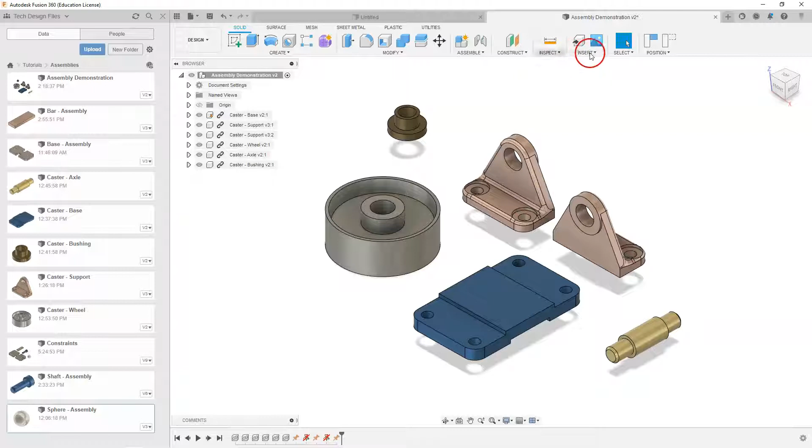So with this in place right now, I am going to select assemble and joint, or J for short.

What I want to do is select this hole with this hole here. I have to select the object that I'm moving first, and select the center of that hole.

And place that on the center of this hole. It will move into place, and I do not need to make any other adjustments.

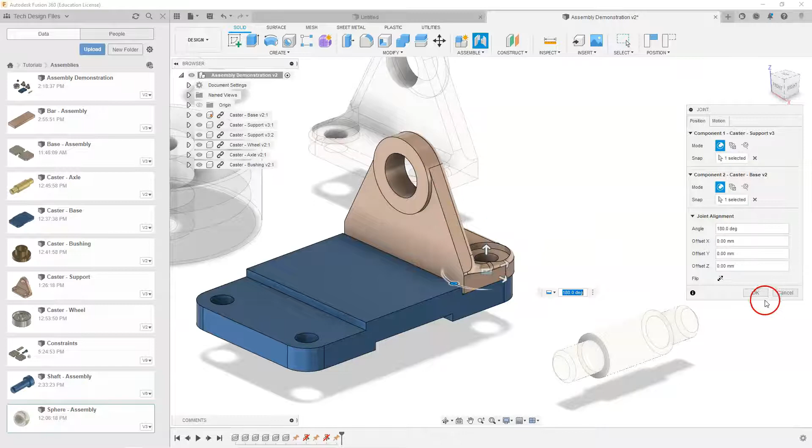If I look at the right hand side view of this, maybe I'll look at the left hand side view instead, might be easier to see. Moving this out of the way, there is a gap in there.

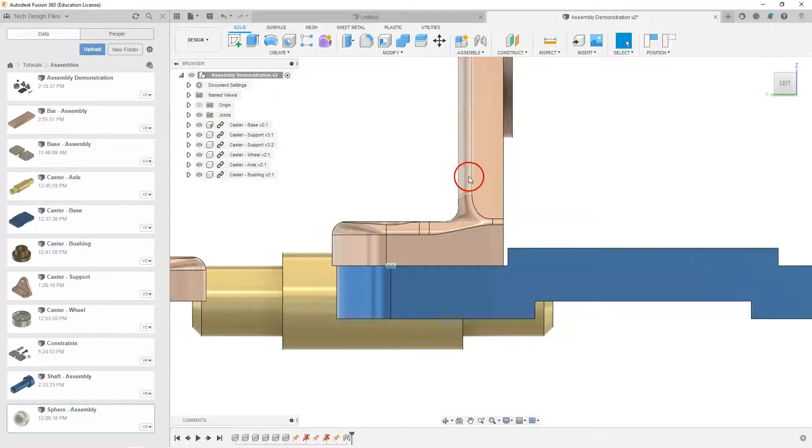So back to our design intent. The design intent is that these holes need to line up. So don't just assume that because this edge is flat, or this surface is flat in here, that those are what we want to align.

We want our holes lined up, looking at the top view, so our holes are lined up the way we want them to be.

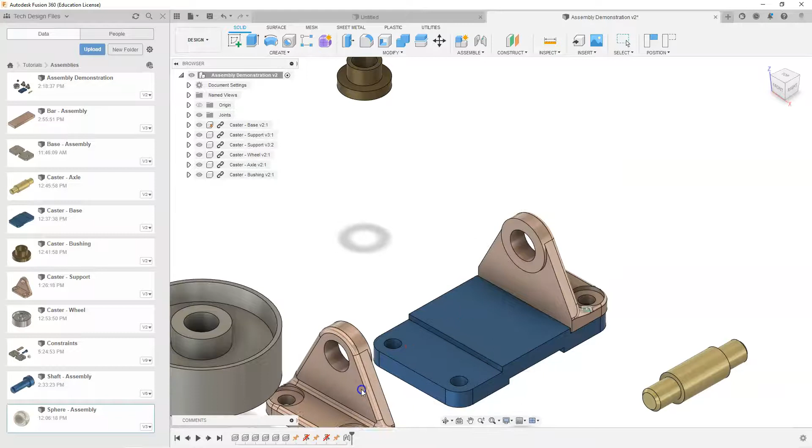So we're going to go in and add our second support, and using the same constraints, I can just move it over here for convenience, and I'll select J for joint.

And I'm going to select once again the center of that hole with the center of the hole in my plate, and that will move into place.

I don't need to make any other adjustments, and my motion is fixed. So if I select animate, you will see it shakes.

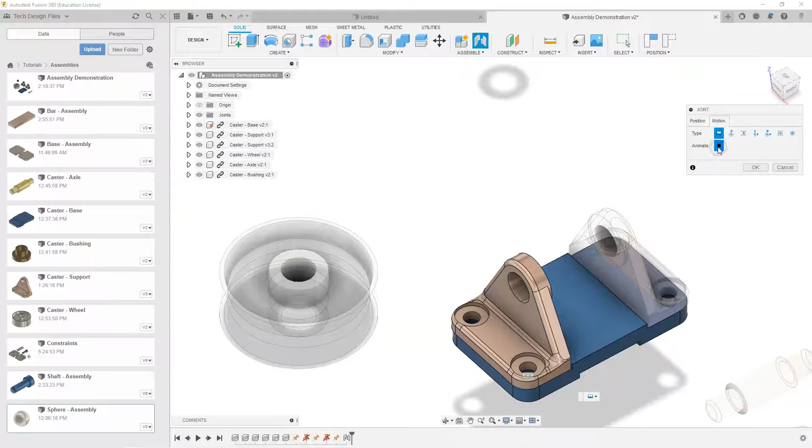That means there is no movement. So I will select OK, and we are done adding our caster supports. Both of those are in there, and I'm just going to go ahead and save my file.

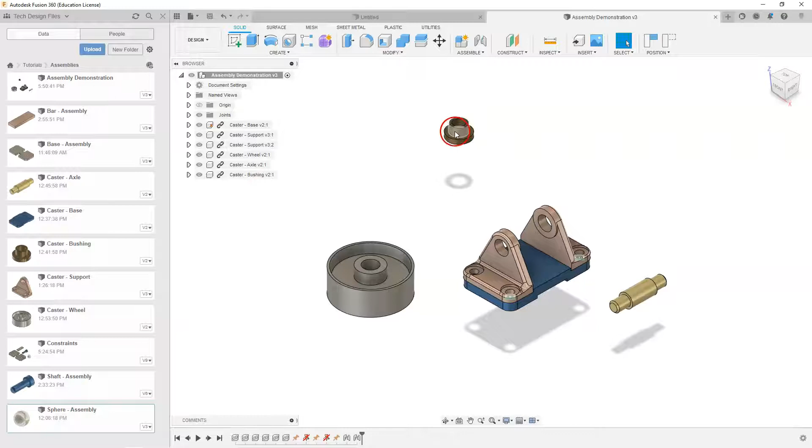The next component we want to assemble is our bushing. We're going to put this bushing on the inside of the surface here. So J for joint, and we want this surface here.

I'm going to select that surface and that center, and join it with this surface and this center. Select my second object, and there we go. That should move it into place.

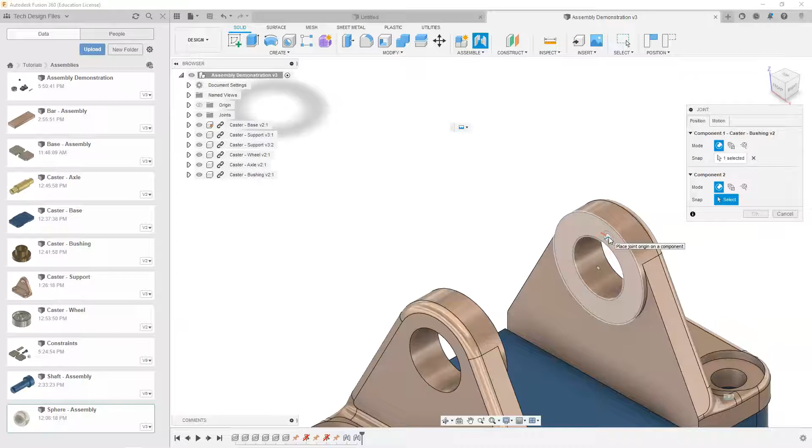And this is going to be fixed as well. So checking our motion, that is fixed. We do not want that to rotate. Select OK, and we need to put another bushing in.

We don't have one, so we can use the move copy command, or we can drag one from our data panel over there, and then move that into place, adding similar constraints.

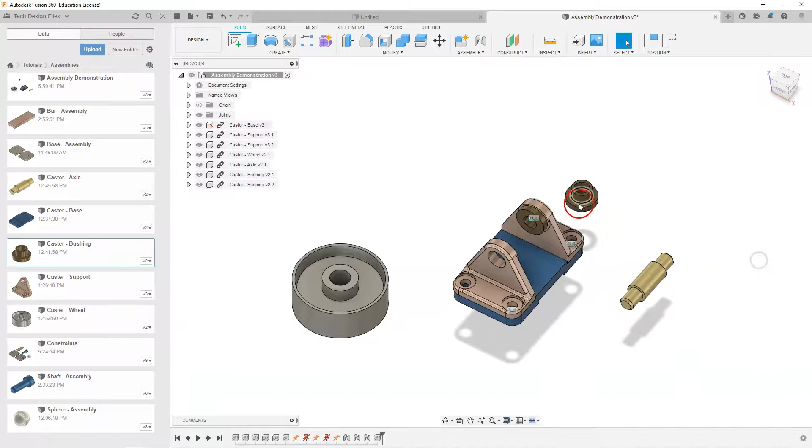So we're J for joint, and we want again to put the center of this surface. I'll use the outside edge this time to demonstrate, and similar to here, it will move that into place. It is backwards, so we're going to flip it.

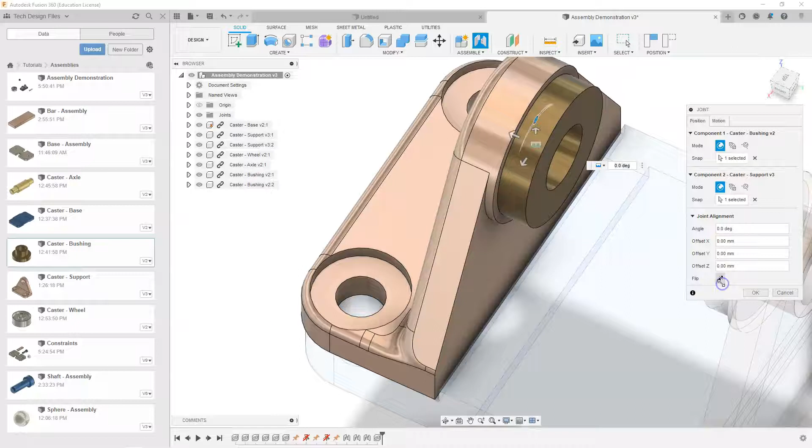That is how we want it. Motion is fixed, and we do not need to make any adjustments. Select OK, and we are next.

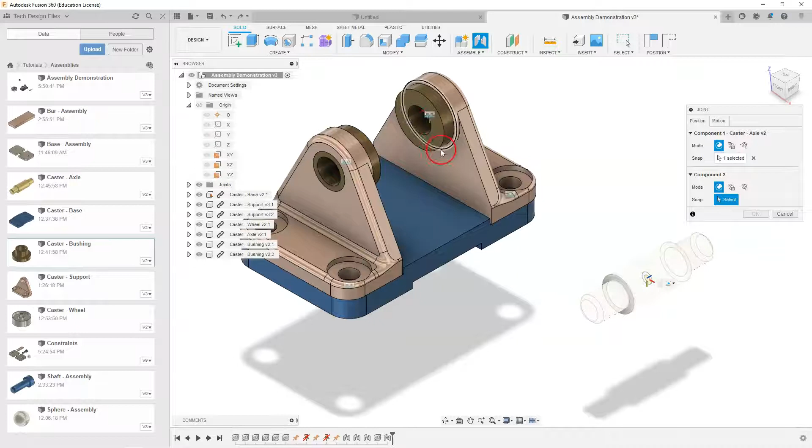We're going to add the axle. So J, select the shortcut J, and we are going to select the center of that, and we can select the center of one of our bushings, and that will place it in there.

And you can see it is not fixed in the middle. So what we need to do is drag that to the middle here, and the value we're going to put in is -22.5 millimeters.

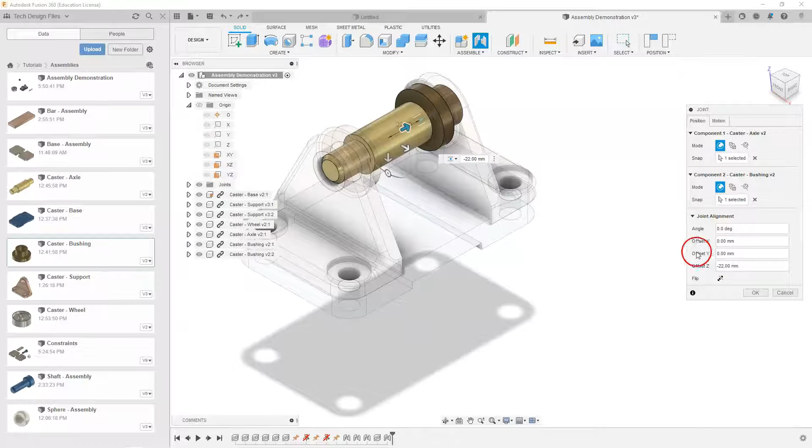That will center the object. Back to our ISO view, and we have almost everything constrained and assembled so far.

And the last component we are going to add is the wheel. I'm going to update my assembly because I added a little hole in here so that we could actually see the rotation.

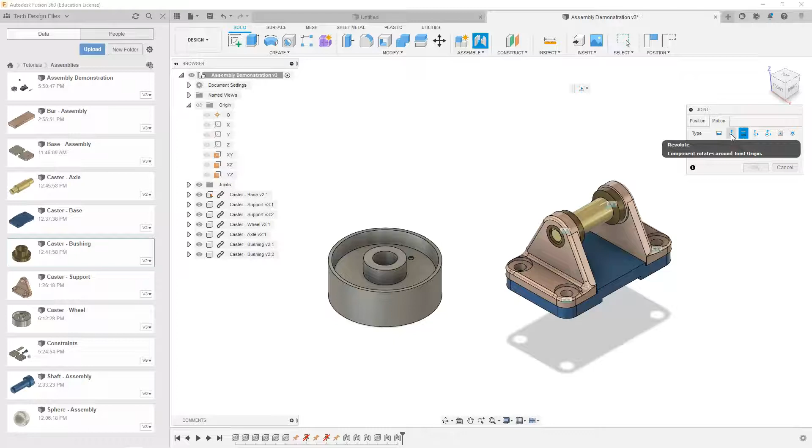Selecting my joint command, the motion is going to be the revolute option. We want to pick the center of this cylinder through the middle, or the center of the hole.

Select that center there, and the center of the shaft. So we will put that in place, and you can see that that is allowed to rotate there.

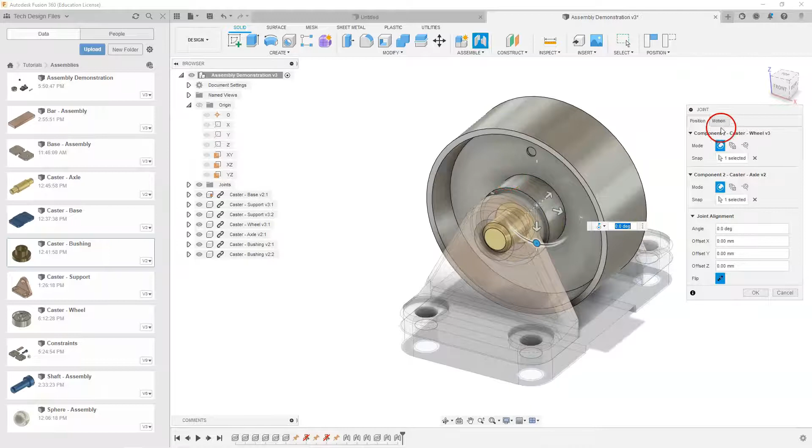If we click on the motion and do a play, we will see that it is actually rotating around that shaft. Looking at the right side view, we can see that everything is centered appropriately.

So we will select OK, back to our isometric view, and we could turn off all our joints if we wanted to. They're visible now.

Select that button, we can turn them off, and we could also change our visual display to just show shaded, no hidden edges.

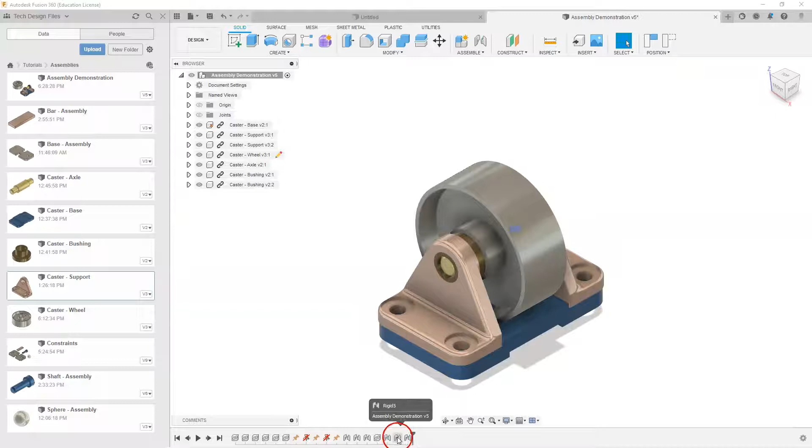Before we complete this video, one change has to be made in this constraint here on this joint. So I'm going to double click on that constraint, and it was selected for a slider previously. Make sure that one is selected as a rigid joint.

So we want that rigid. Select OK, save your file. And that concludes this tutorial.